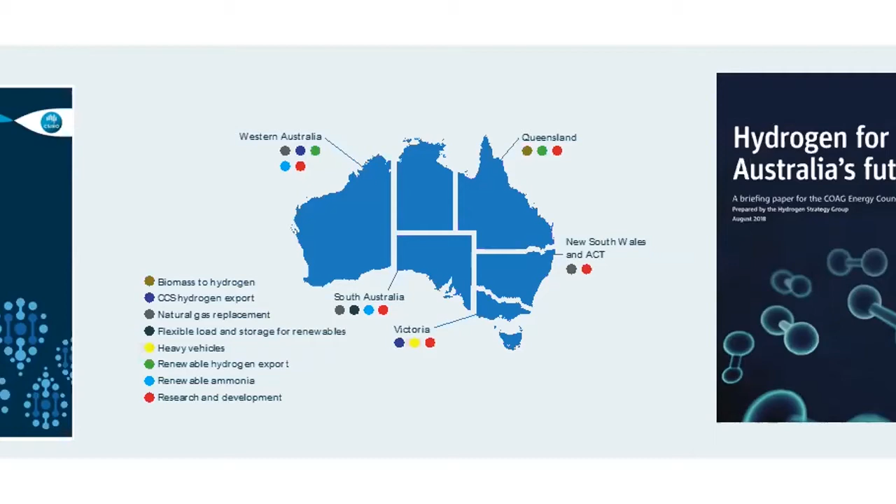A plug to Jock and Mike and the team - New South Wales is leading the charge in terms of getting on with the job, particularly in agribusiness. Just a quick view around the country.

The federal government's made money available to a big project up in Queensland, in the Daintree - hard-nosed economics in terms of getting more reliable electricity. Most of the folk up in the Daintree are running off diesel generators, so if we have floods and can't get diesel, you've got no power, meaning loss of income both in agribusiness and tourism. So there's a big project up there now going off grid - solar, wastewater, and hydrogen to run generators for agribusiness and tourism. That's real, that's now, and there's money available for larger schemes for communities to go off grid to hydrogen.

One closer to home is basically New South Wales transport. There was a call yesterday that the former minister, or shortly to be former minister, Constance, made, that all 8,000 public transport buses in New South Wales will go to zero emissions - a mix of battery electric buses and fuel cell electric hydrogen buses. We're working on a program now to roll this out over the next 2 years, so once you're in the city and regions, you'll start seeing interesting stuff happening on the roads with public transport. That's great to see.

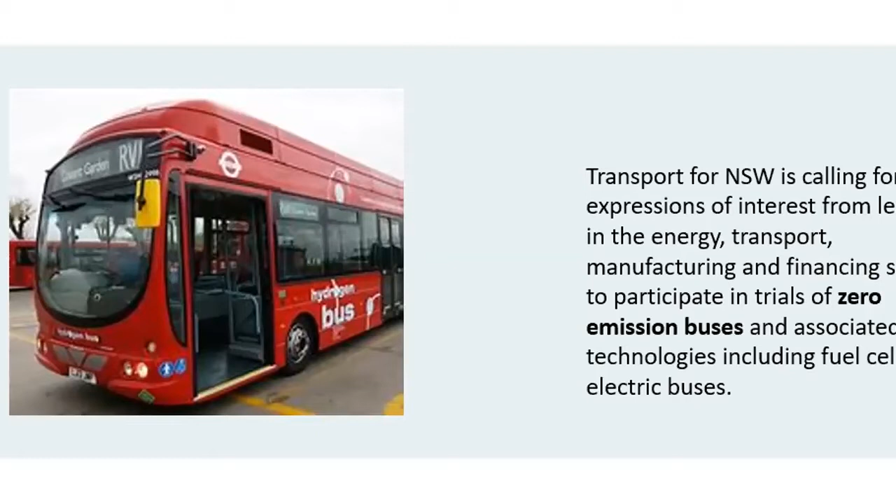At the big end of town, in a big country like Australia, one of our challenges with diesel, particularly in regional Australia, is the cost effectiveness of diesel for transport - the tyranny of distance. One of the problems we have with carbon accreditation for agricultural products is the high carbon miles from transport, so one of the things we're working on currently is with the major prime mover manufacturers.

We've had an announcement in WA that Hyzon has decided to set up shop there, and also, not to be outdone, a group of management team ex-Hyzon are setting up in Port Kembla. So bring it on - lots of competition in the heavy trucking sector, which will have a ripple effect in terms of reducing our carbon mile intensity on agricultural produce to market internationally. Our European customers are very keen to see the carbon mileage and intensity of our farm produce, so these trucks will certainly help improve that competitive advantage here in Australia around renewable hydrogen usage.

Pleased to say that ARENA, the Federal Renewable Energy Funding Agency, had a call for $70 million worth of funding for hydrogen projects, which would generally pay for about 2 or 3. The program was oversubscribed with about 36 projects going up for around $3 billion in project value. So it certainly shows that the topic of hydrogen is very much advanced at the industrial scale, with lots of announcements probably late July, early August in terms of projects being rolled out through that ARENA fund.

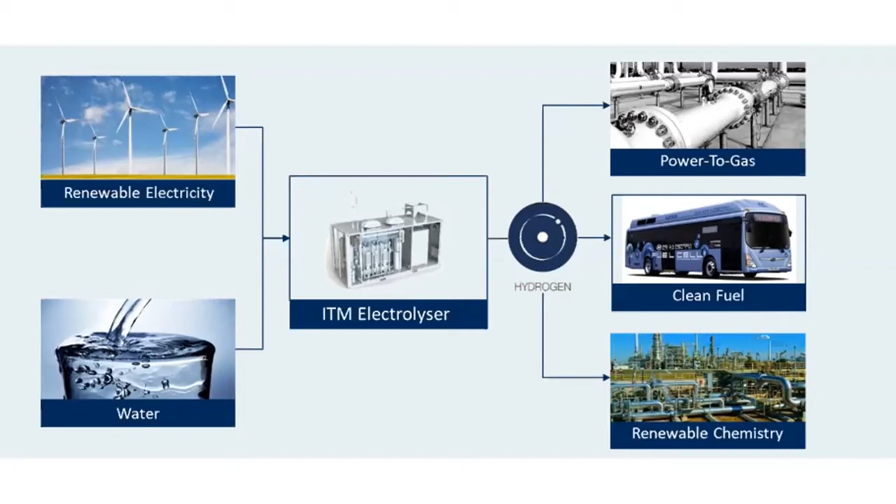ITM itself, I first met them back in 2009 in the UK. They floated in 2004. Over the period from 2011 to 2018, they've scaled up the equipment by a factor of 100. As Charles alluded to with the cost of batteries, similarly the scale-up effect on the cost of the electrolyser that turns water and renewable energy into hydrogen and oxygen has gone up in scale and come down in price significantly. That's really allowing us to do what we're doing here in Australia today with much more economic effectiveness.

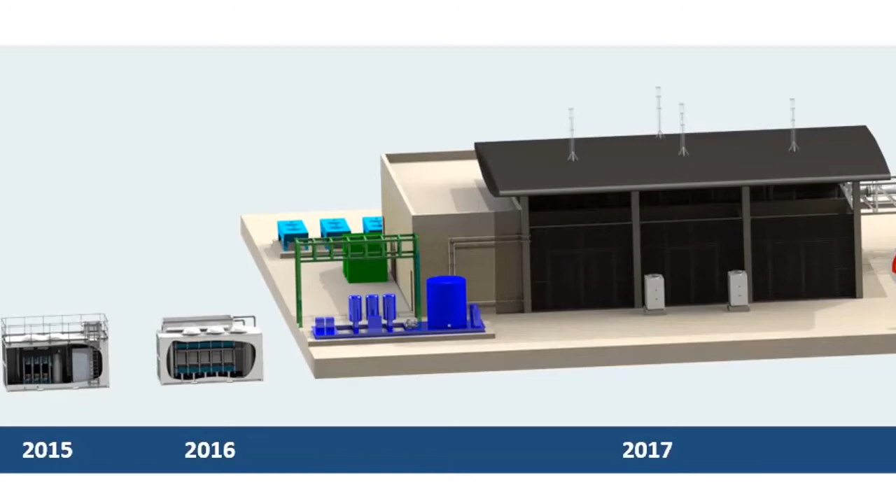Last year, we were bought by Linde Gas, 20% investment, and set up a joint venture that now gives us much greater reach into technology, both on farm and in industry, in terms of fueling stations and gas conversion equipment. So it really gives us the opportunity as a group to have an end-to-end solution.

So we're talking about upstream production and downstream dispensing - fuel dispensing equipment for hydrogen for trucks, tractors and buses. And I guess just summarising the approach, I've worked with Charles and his colleagues on a number of projects, both in industry and in agribusiness.

The overall approach is transitioning to a circular economy where we're basically using waste outputs and turning them into something valuable as an input. So we're using waste from the piggery, turning it into gas and also into a fertiliser, and also renewing and reducing the cost of our energy going in behind the meter using PV, wind, as Charles said, biogas. But also because we're creating some waste products into biogas, having both biogas and renewable hydrogen on farm creates new opportunities around potential downstream products as industrial feedstock, which we'll talk about, such as ammonia.

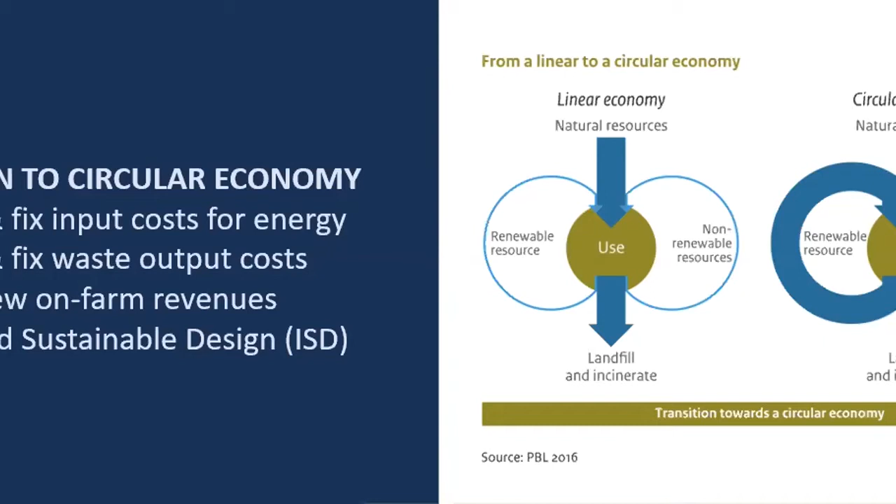So we call this ISD, Integrated Sustainable Design. That's really what Charles and the team are practicing.

We're using hydrogen as a storage medium over the longer term and at larger scale. But as we said, it can be used for making renewable power. We can turn that back into heat by burning it, or we can use an absorption chiller to create cooling, which is very important in the dairy industry, but also use it as a transport fuel in fuel cell electric vehicles, both large scale and small scale on farm. And finally, we can use the spare oxygen, potentially the gas coming out of the biodigester, and create NH3 ammonia.

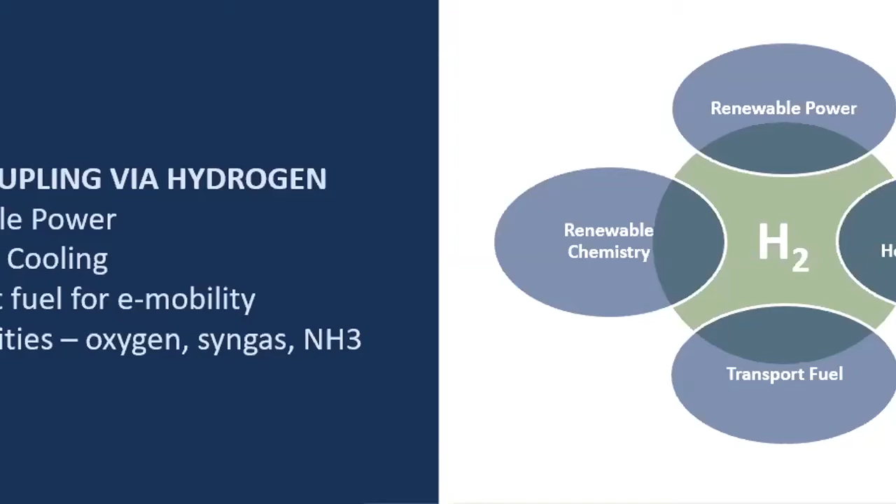So there's all sorts of other opportunities to create new revenues on farm from hydrogen as a starting point. This slide just really shows some of the industries. Obviously in New South Wales, there's a lot of discussion at the moment around Port Kembla and how we look at green steel as a big play, and some announcements to be made around that. But also, as I said, the chemical industry as well. How do we actually decarbonise some of the industries around ammonia and making fertilisers? So a lot of work going on in Australia and internationally, and using hydrogen as a renewable chemistry feedstock.

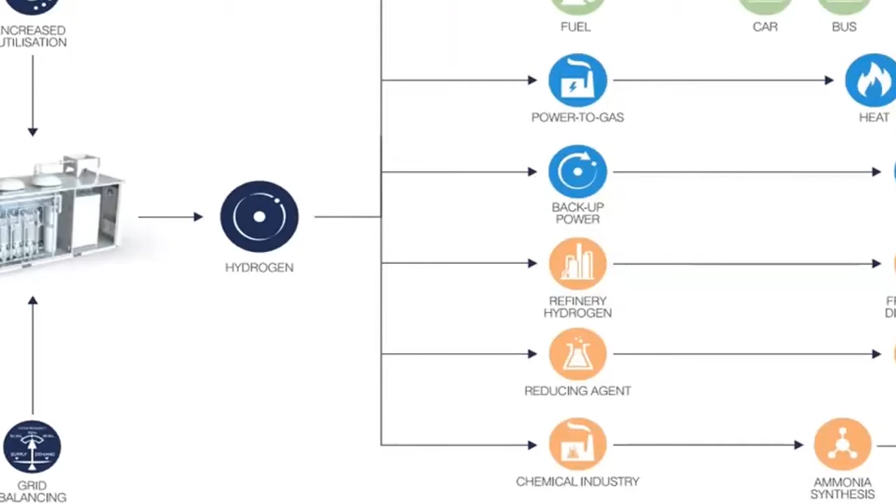The nice thing about all the farm projects I've been involved in with Charles and others is that we now have plenty of opportunities around solar. A good point was made earlier about not having solar on arable land, so we can certainly use wasteland, and certainly a lot of the projects I've looked at have been using flood zones where you've got the right sort of racking for the solar to withstand flood events. But also a whole heap of work being done by my university, QUT, and others around a new subject called agrivoltaics. So finding crops that actually grow underneath solar panels is pretty useful as well.

Water obviously is a feedstock we need to make hydrogen, and I guess we don't want to end up like Americans using corn crops to make ethanol and having people going hungry. Similarly, we don't want to see the same thing in Australia. We need to make sure that the water we use for production of hydrogen is excess water from rainfall, excess groundwater, certainly recycled water coming out of local community sewage treatment plants. And also, if we're using fuel cells to convert that hydrogen back into electricity, one of the byproducts of that is heat and water. So again, we can close the loop, so to speak, on the water mass balance. Fuel cells are quite useful to give us water back to reuse. So we're moving to a closed loop system on water.

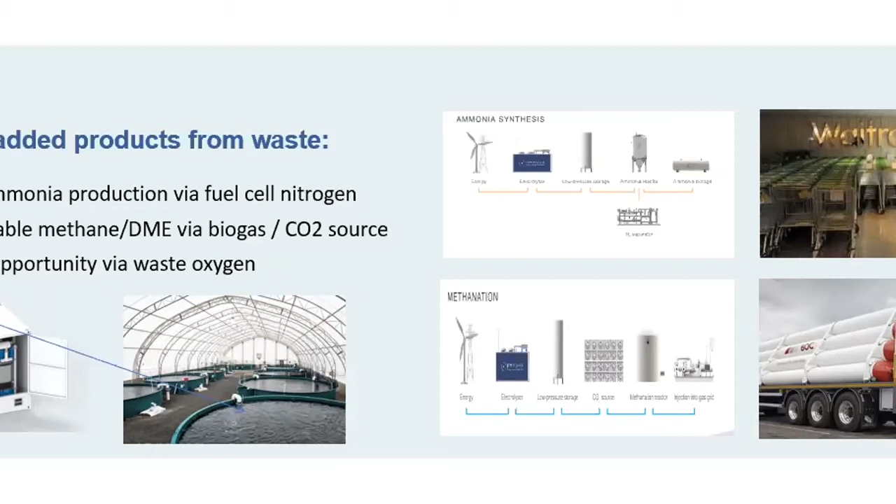As I touched on, we have the aquaculture opportunity. So again, having renewable hydrogen on farm can actually combine with other chemicals such as CO2 from biogas to create new opportunities and new revenues for the farm. So it's about diversity and sustainability.

I guess one of the best examples I've seen, and again, credit to Charles and his team, was when I was brought in 3 years ago to work with Charles and his team on a large-scale abattoir project in Queensland up around Gladstone. I was quite amazed to see the cost per head of processing beef at around $300, compared to our competitors in the US at around $150 equivalent, and some of our competitors in Asia under $100 a head. Using hydrogen to both run the plant but also for the logistics has actually helped us get that down to around $200 a head.

So basically, with our quality at that price point, we have a huge opportunity to improve our exports in processed beef. But at the same time, we're using that wastewater to create spare hydrogen for export to Japan and South Korea. So the abattoir is basically a renewable hydrogen production plant as well as a beef processing plant, and we're using that to create extra revenues for the facility.

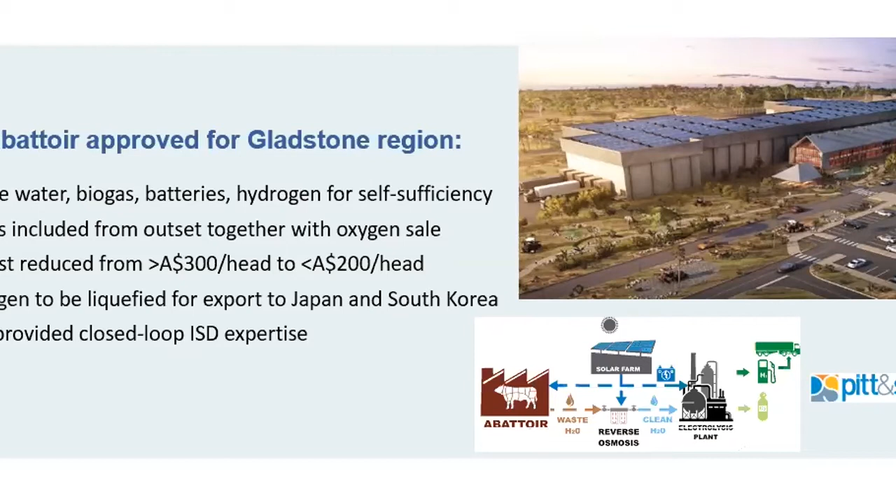In a nutshell, it's been fantastic seeing the availability of funds to help de-risk the exploration of hydrogen on farm from New South Wales DPI, and certainly Charles and some of the other project partners, Pitt & Sherry, have worked at some initial audits to really get an understanding of where the energy is being used on farm, both in stationary and motive applications, to start building up an idea of, okay, if I can start producing renewable hydrogen on farm, what's the return on investment and what sort of transition?

And I think fuel security has been flagged as an issue. So this is about the economics up front, but it's also about security of supply. Having cheap diesel is no good if our diesel supply lines are interrupted by unfortunate military action in the north of Australia. We're not bolstering our military resources in the north for nothing. We're exposed from a fuel security viewpoint. So this is about sustainability as well as economics.

And once you've done a bit of a study with the DPI funding and a proper audit, you can start to assess: is it hydrogen, is it battery, biogas? You start to look at the options and start to look at a proper FEED study. And then, as I said, there's plenty of money at the federal level as well to help offset the capital expenditure on the infrastructure.

So we use a 4-stage process, and attending the webinar today, I think a lot of you have already started on this process. If you haven't, I certainly encourage you to reach out to Charles and Jock and the team to explore how you could get started on this pathway. So that's pretty much it for me. I hope it was useful. And as Jock would tell you, I'd much rather answer some questions and help the process along that pathway than spend any more time.

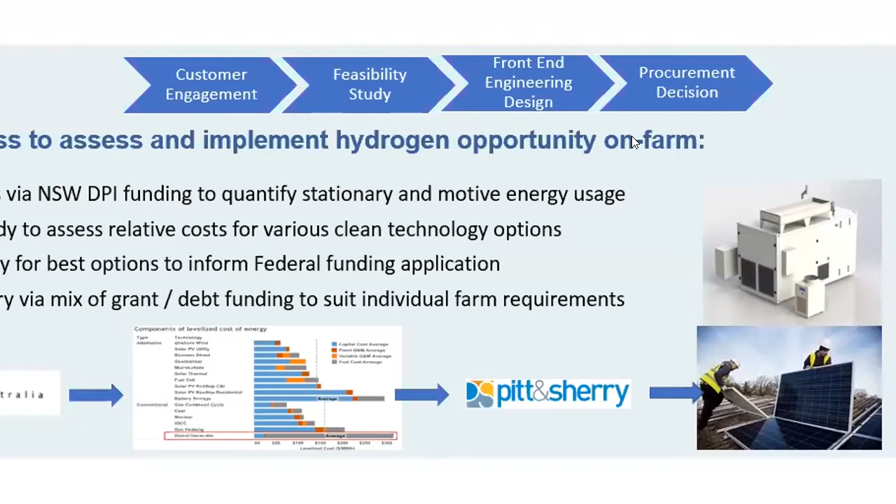One thing that we are developing in the background to this sort of business is an energy demonstration trailer. So the idea is that we will be able to go around to field days over time, should we ever be able to go out in the public domain again. But when that happens, and we have field days and shows and things like that, our plan is to actually take a trailer mounted fuel cell hydrogen unit as a demonstration of this technology.

There's a whole pile of things that can run off that even now, just from a basic fuel cell. But the plan at this stage is to demonstrate it using hair cutting technology. So we'll actually go to shows and we'll do some charity shaves, but that'll all be powered by a hydrogen fuel cell arrangement. Just as a demonstration, we'll also run a few pumps and the normal things you might do in an agricultural sense. But it's just to show that the technology's there, it exists, the hydrogen's there, there is an opportunity to actually adopt this over time.

And I guess as a fill-in, one of the thoughts I had while we're waiting for Neil to reconnect with the world is that over time, there's been similar groups of people sitting on similar hills looking out over the horizon. And I'm pretty sure there was a group of people who rode horses to the top of the hill and looked out and saw steam, and some of them went, oh, that steam engine will never work. And others jumped into the idea that steam could be the machine of the future, power of the future.